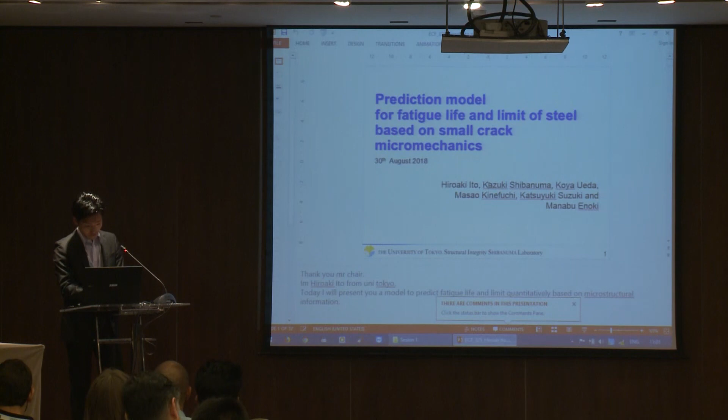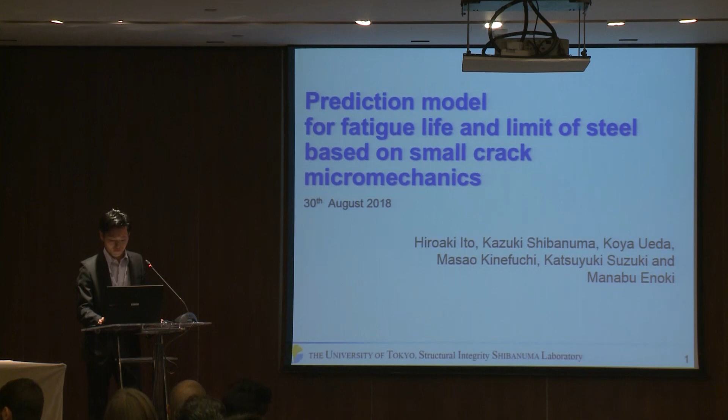Thank you, Mr. Chairman. I'm Hiroaki Ito from the University of Tokyo. Today, I will present you a prediction model for fatigue life and limit of steel based on small crack micromechanics. This is the outline of this presentation. First, I'll explain you the background and the objective of this study.

Fatigue fracture is the main reason for the accident of structures. And so it is important to predict the fatigue life and limit. It is known that these fatigue fracture properties are affected by microstructures. In spite of this knowledge and many researches, there are no quantitative models to explain the influence of microstructure.

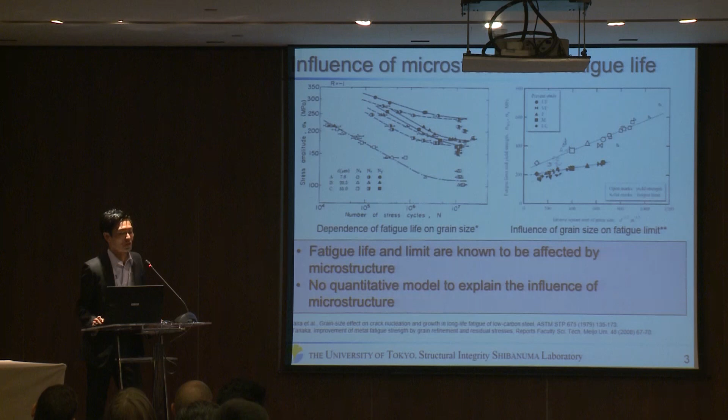Fatigue fracture is divided into two stages. The first, crack initiation, is called stage 1, and crack propagation is called stage 2. It is commonly known that fatigue crack behavior is highly affected by microstructures in stage 1 and stage 2, but these stages are not clearly defined, so behavior of micro crack should be captured.

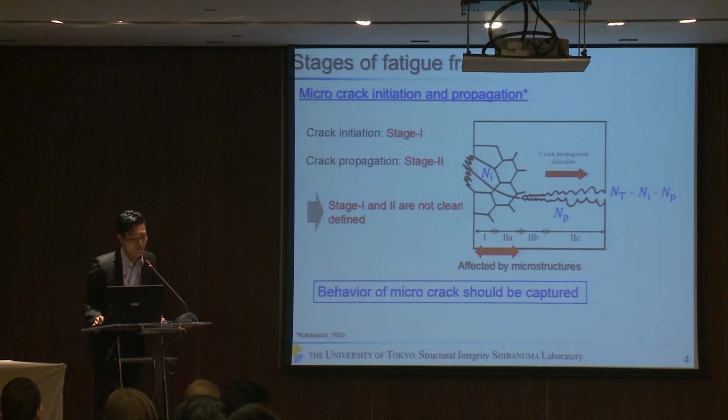So this is the objective of this study. The objective is development of a general and quantitative model to predict fatigue properties based on microstructure information. In this study, we focus on ferrite pearlite steel because it is most widely used, and its structure is rather simple. So this can be the first and fundamental trial to develop a general model.

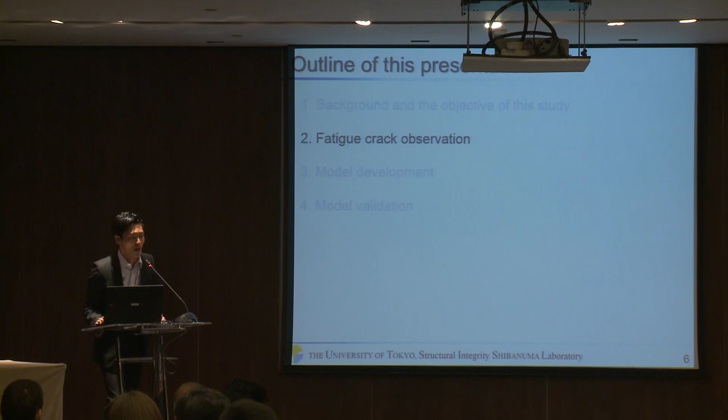Okay, so next, before a model is developed, stage 1 and stage 2 should be clearly defined. So in order to capture the early stage of crack initiation and propagation, fatigue tests and observation were conducted. So the condition of the test is shown here. In this experiment, tension and compression test is conducted, and the specimen is with a gentle notch in one side, so that the crack initiation site can be easily predicted.

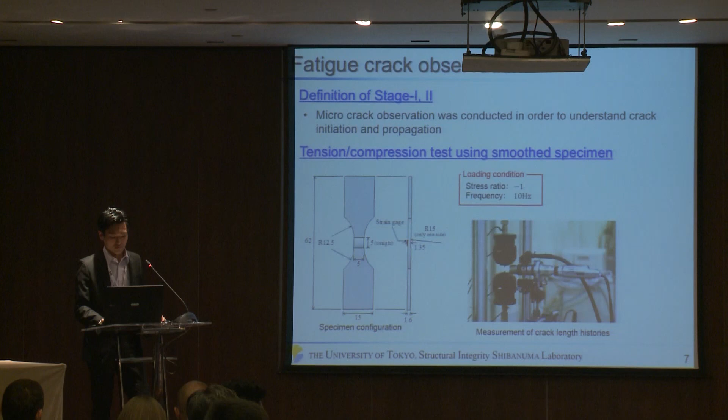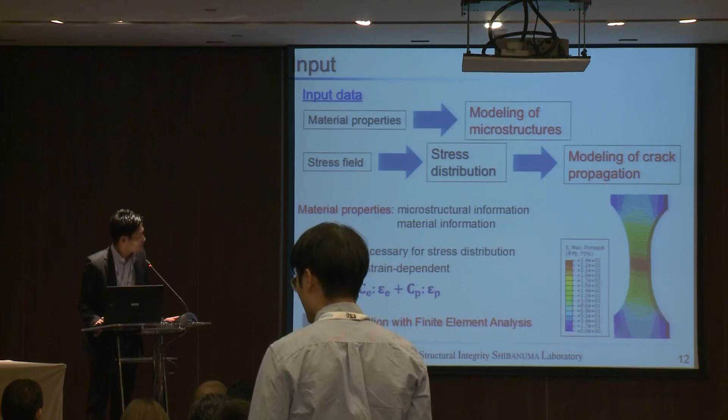And next is a model development. The outline of this model is here, and it is divided into 3 parts. And the first, input part. As input data, material properties and the stress field is required. Material property is used for modeling of microstructures, and the stress field is used for stress distribution. Since the fatigue fracture is said to be determined by strain, the stress distribution is calculated from strain field in this model. To obtain the strain field, in this model, finite element analysis is combined.

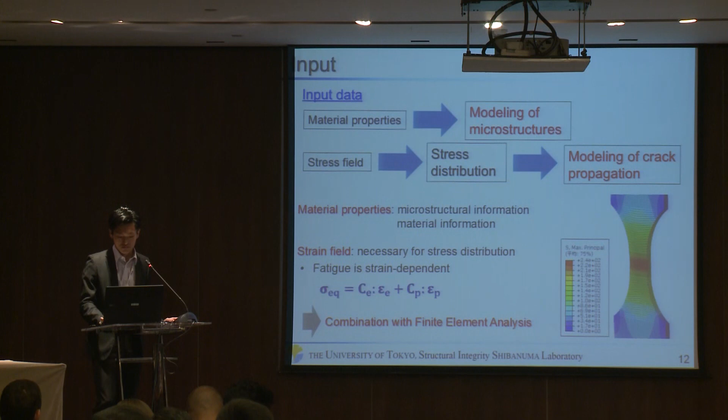In FEA, the effect of cyclic loading is considered. It is known that the stress and the strain relationship changes under the cyclic loading. So this equation is employed. So the effective stress distribution can be obtained by this equation.

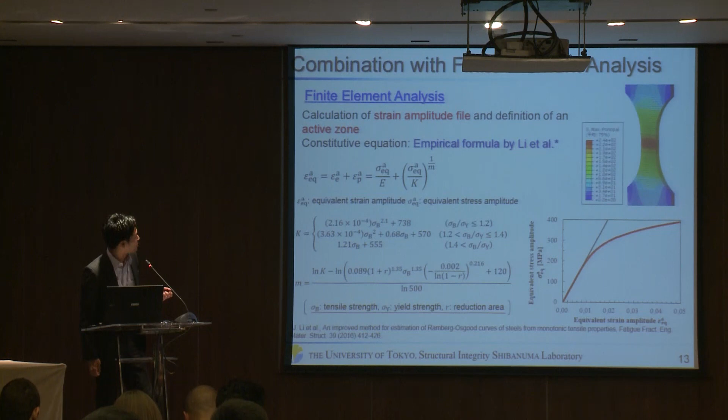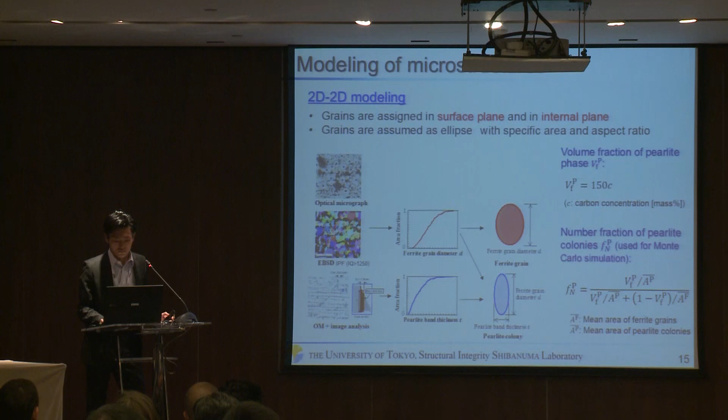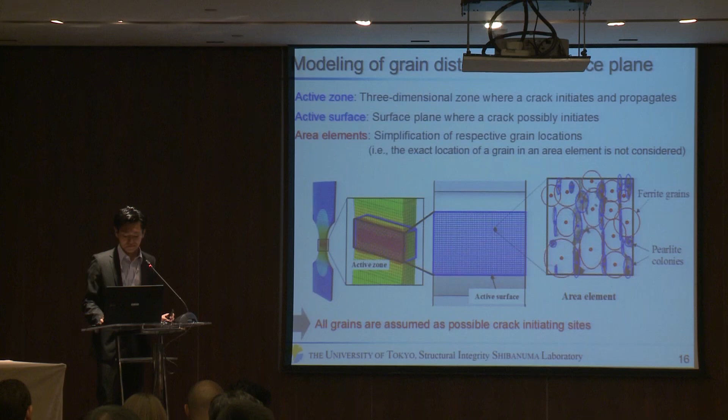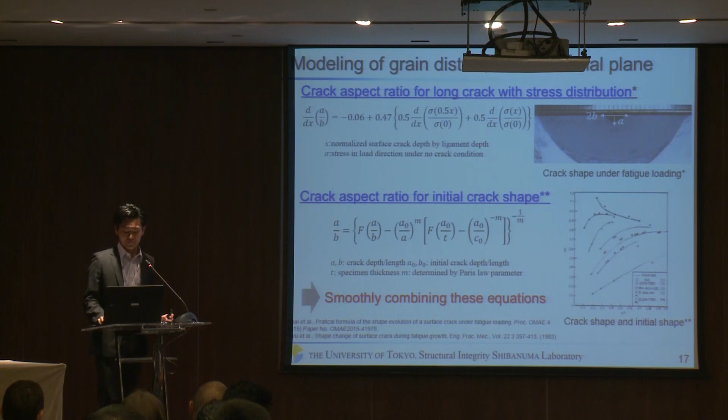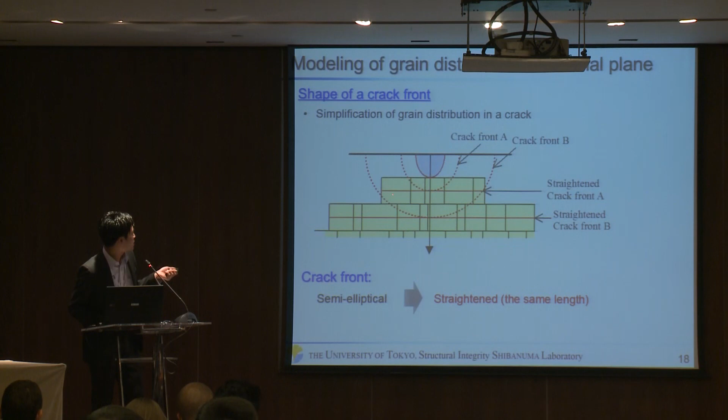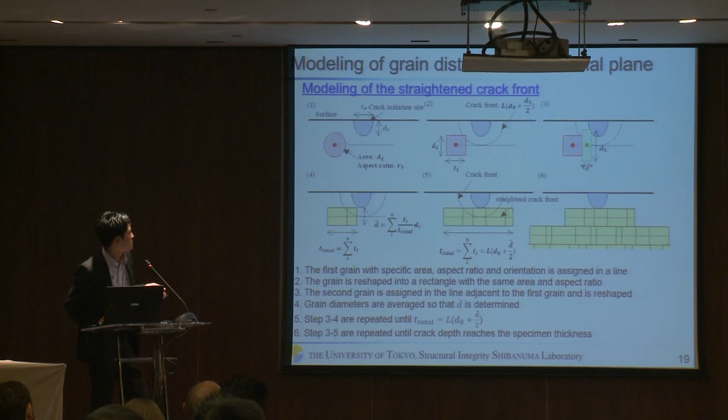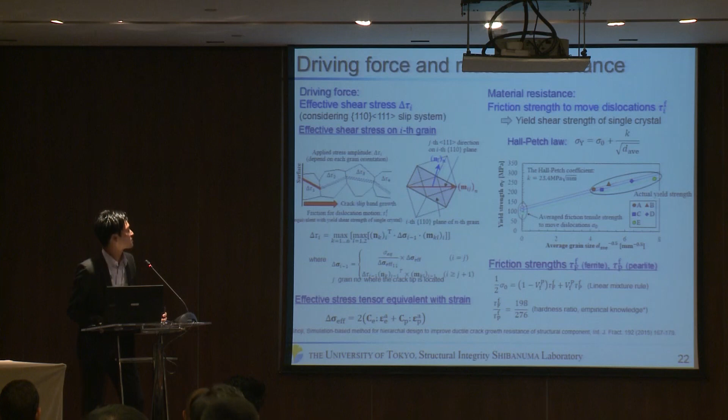In this model, the driving force is effective shear stress. The effective shear stress is calculated using the effective stress tensor, and the effective stress tensor can be calculated from the strain tensor, and also the equivalent tensile remote stress is considered. I'll talk about it later. And material resistance is the friction strength to move dislocations. This is the yield shear strength of a single crystal, because yielding is caused by the movement of dislocations. This is employed as material resistance, and it is calculated by the Hall-Petch law.

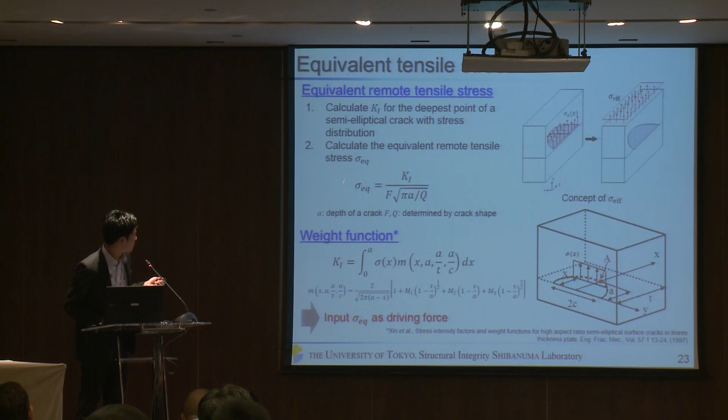In this model, equivalent tensile stress is used. Since there's this stress distribution, the crack tip stress intensity factor is calculated from this. And the equivalent stress is calculated from this equation. To calculate the stress intensity factor, a weight function is employed, and sigma equivalent is input as the driving force.

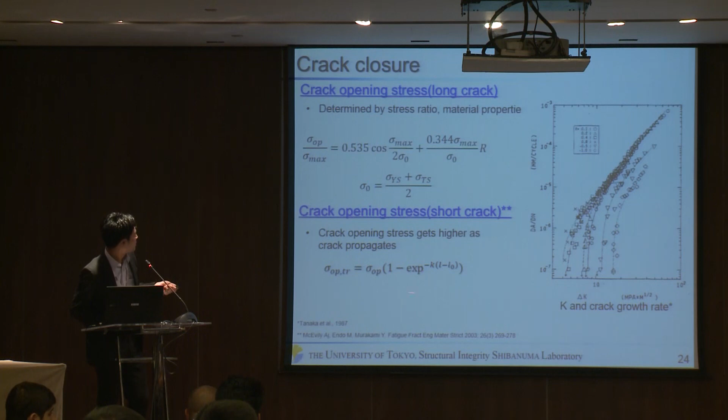Okay, so next, crack closure. Fatigue life is said to be affected by crack closure, so the effect of crack closure is considered. For a long crack, the effect of crack closure is constant, as shown in this equation. But for a short crack, the opening stress changes, so this equation is employed to consider the change.

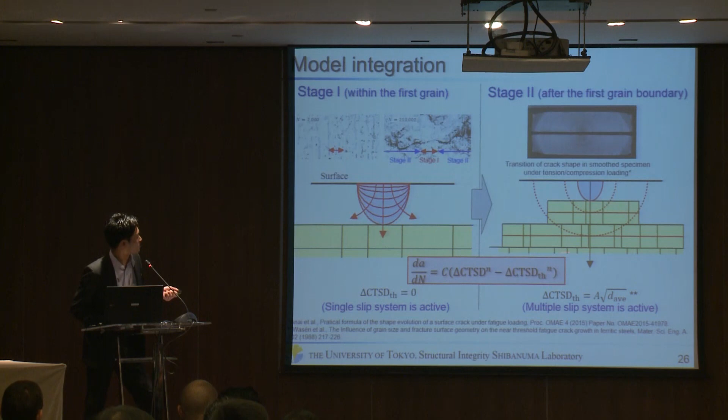Okay, so model integration. As I explained, stage 1 propagates in the first grain, and stage 2 propagates over grain boundaries. So in this model, these stages are combined. The threshold is shown like this. In stage 1, it's 0 because a single slip system is active. But in stage 2, the threshold is this value because multiple slip systems are active.

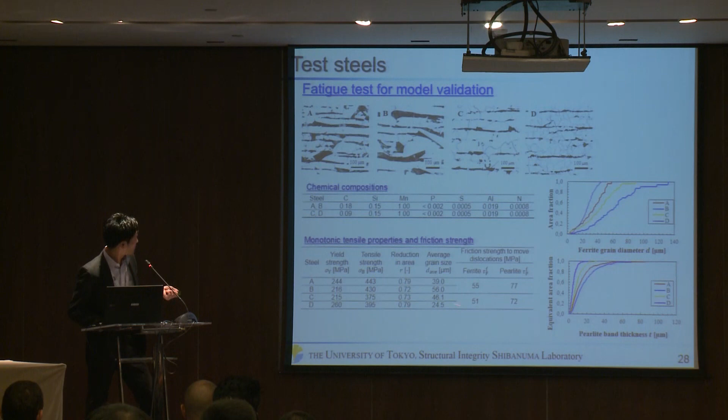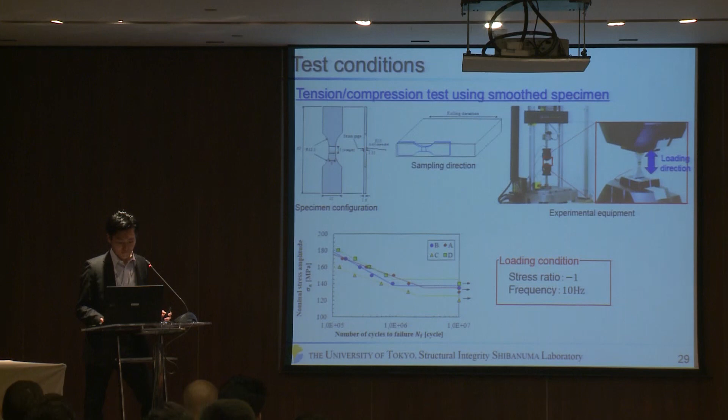Let's move on to the model validation. In this model, these different steels are used. Tension/compression tests were conducted using smooth specimens, the same as those used for observation, and full Wöhler curves were obtained. And prediction of S-N curves: the Paris law parameters are fitted for only steel B. So this is fitted, and with this parameter, these predictions are obtained. As you can see, it's quite good agreement.